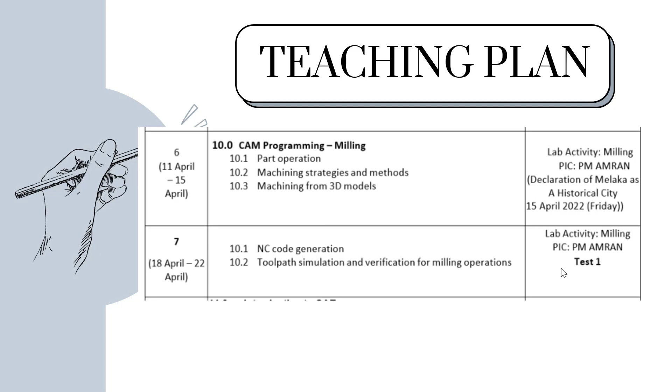Duration is 1 hour 30 minutes. Location uses the ULearn platform. Date: 29 April 2022, Friday. Time is 5 PM until 6:30 PM. And the topic is CAD/CAM and Fusion 360.

For this milling operation, the activities covered are: create 3D part model, create 2D drawing from the 3D part model. This is optional. Then start with the milling operation, facing, roughing and finishing contouring. Continue with the milling operation, open and close pocket. Then milling operation, corner radius at top surface.

And then drilling 10 mm and 20 mm hole. Next, continue with update cutting tool number. Then update process sequence. Because you already finished the process, you have to update the cutting tool number, update the process sequence and generate setup sheets. This is the process of the milling operation, and continue by generating the post processor to generate the G codes and M codes.

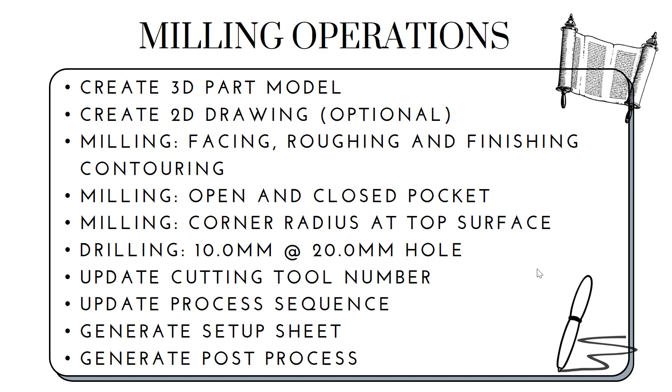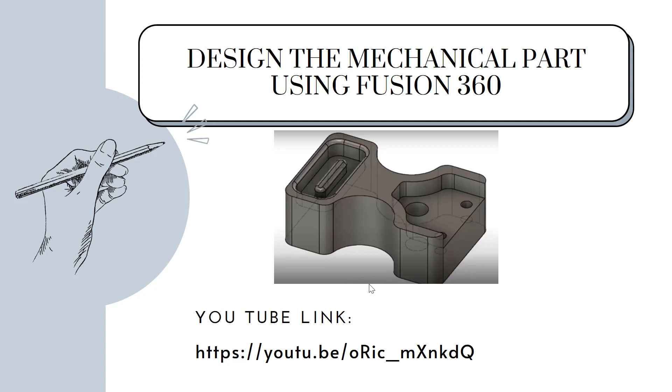First you have to design the mechanical part and 3D part model. Here we can see the parts of the 3D part model. There is a close pocket with island, radius at the island top surface and radius at the close pocket. And this is the open pocket having 3 holes: 2 holes with diameter 10 mm and 1 hole of 20 mm. This contour has a corner radius on 4 sides. You can see the steps to create this mechanical part from the YouTube link below.

This is the drawing for the mechanical part. The length is 150, the width is 100 and the height is 50 mm. The open pocket depth is 15 mm having 3 holes: 1 hole is 20 mm, 2 holes are 10 mm. This is the closed pocket, with length 80, width 35 and depth 15 millimeter. And the island height is 10 millimeter.

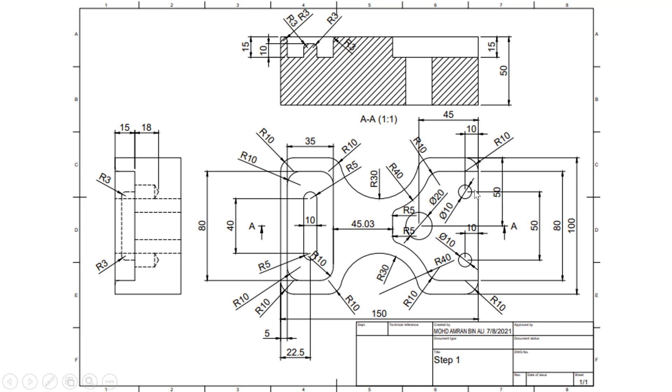There are 5 steps to create the 3D model. First is create rectangular sketch. Second is create closed pocket. Third is create open pocket, then create 3 holes at the open pocket, and create fillet at the edge of the island and closed pocket.

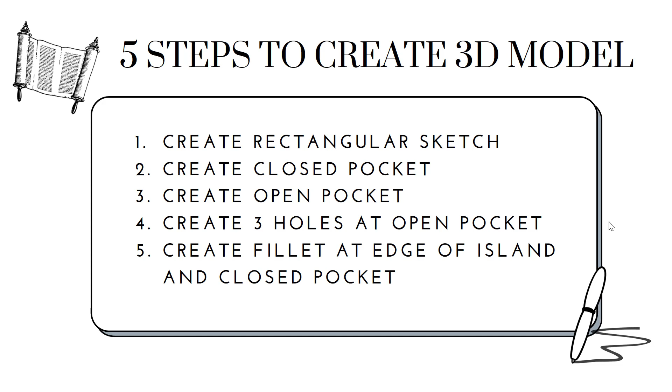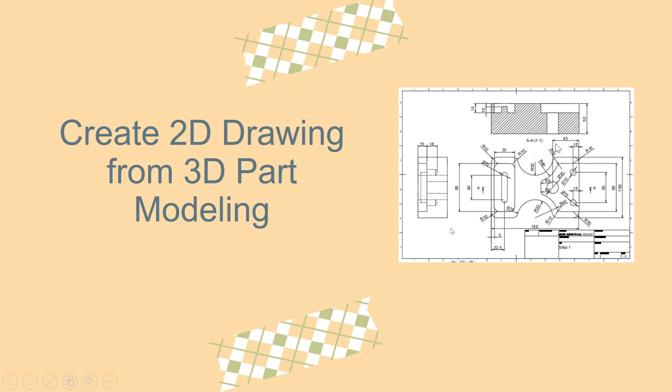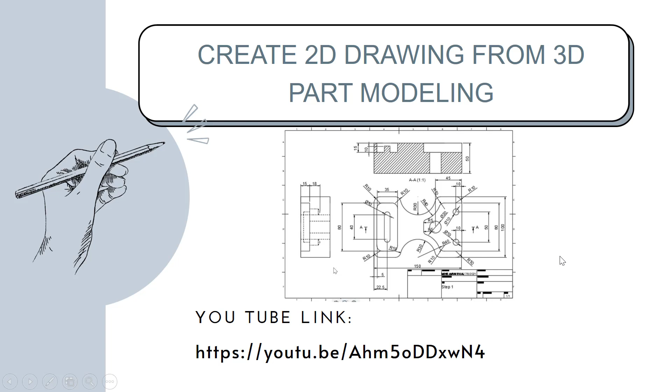Now we continue to create the 2D drawing from the 3D part model. This is how you should get it. The YouTube link you can see here below. 5 steps to create a 2D drawing. First, select from design in the drawing workspace and select export to PDF. Then continue with section view, projected view, and lastly create dimension.

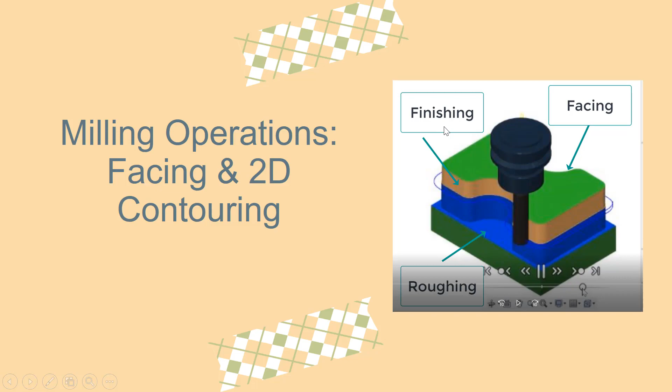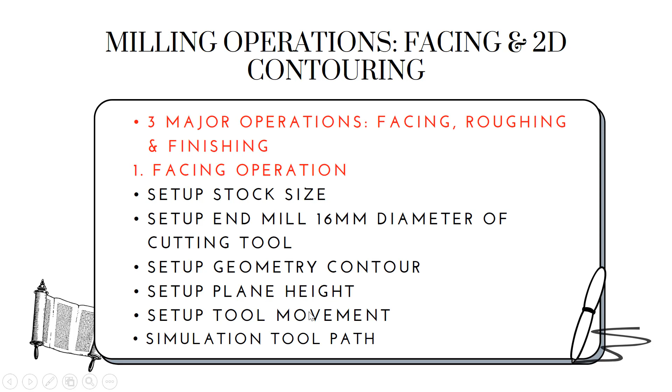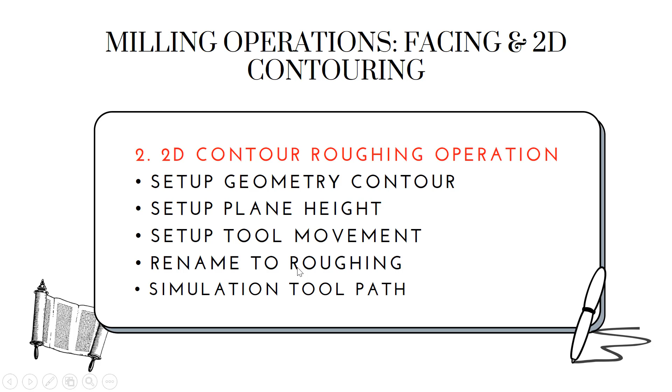Then the second process is the 2D contouring roughing operation. First step is set up geometry contour, set up plane heights, set up tool movement, rename to roughing, and simulate the tool path. You have to rename it to roughing because there are 2 processes, roughing and finishing. This is the process of the 2D contouring roughing operation.

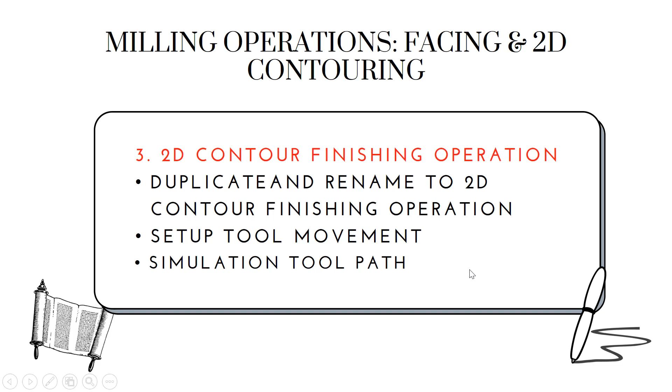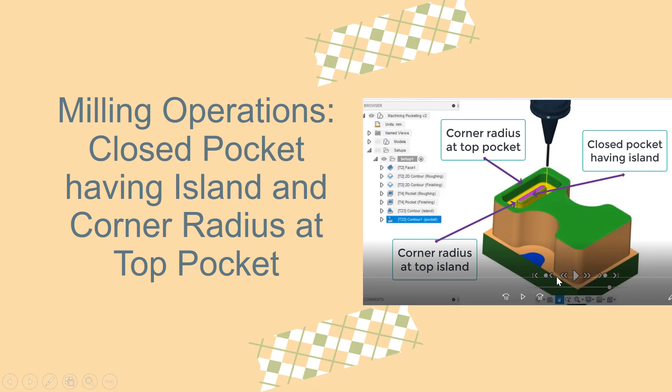This milling operation is the closed pocket having an island and corner radius at top.

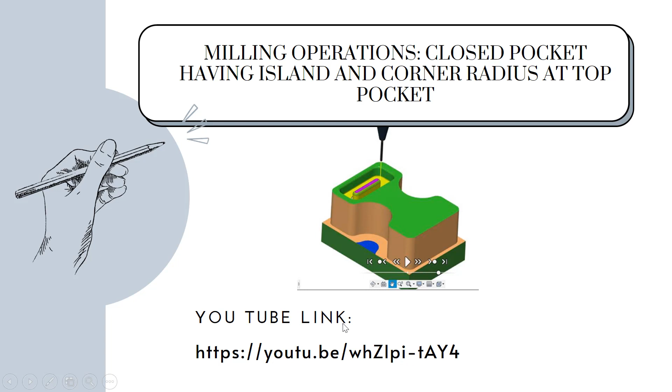There are 4 major operations for this closed pocket having an island and corner radius at the top pocket. First is roughing and finishing the closed pocket, and then milling the radius at the top of the island and the radius at the pocket top surface. First is the rough closed pocket operation.

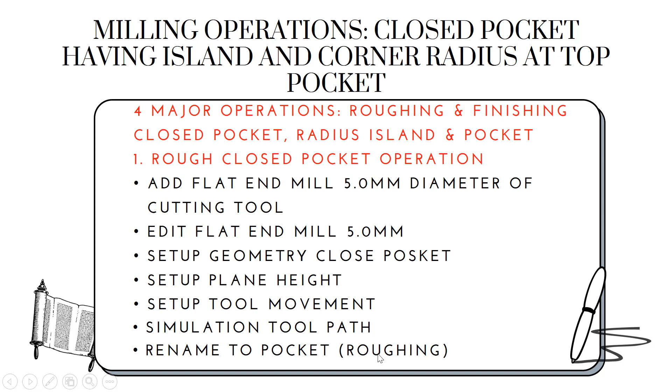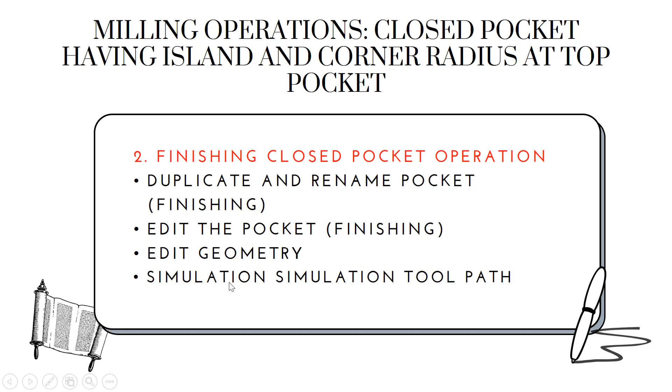Continue with the finishing closed pocket operation. Duplicate the folder and rename the pocket to finishing. Edit the pocket finishing, edit geometry and simulate the toolpath. You can see the different colors. This we call magenta, and this is orange. You can see the difference between roughing and finishing.

The third process is to cut the corner radius at the top island. Add the contour process. Add the ball nose 2 mm diameter. Set up to cut the corner radius at the top island and simulate the toolpath. Then duplicate this folder, contour island to contour pocket. After duplicating, edit this process, for example set up the contour and simulate the toolpath, and in this video we can see some adjustment.

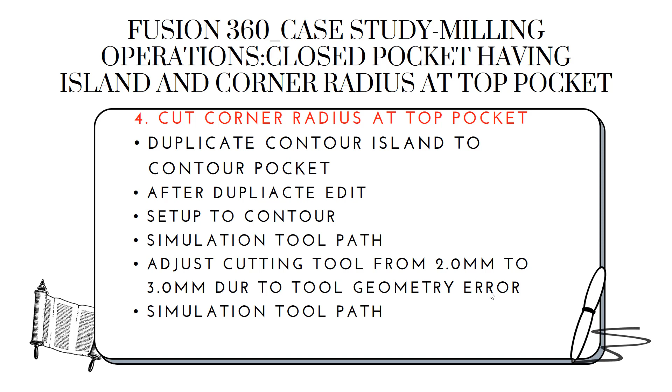Adjust the cutting tool from 2 mm to 3 mm due to a tool geometry error. That means the 2 mm cutting tool length is not enough to cut the closed pocket. So the tool must change from 2 mm to 3 mm. And then last is the simulation toolpath.

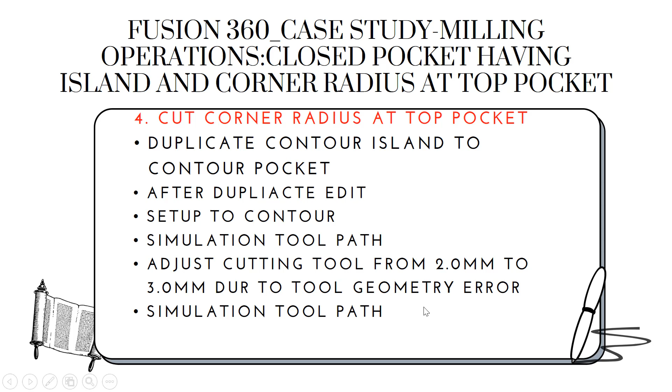You can see here the process of roughing and finishing the pocket using the flat end mill. This is how to make the radius at the top of the island and the corner radius of the top pocket.

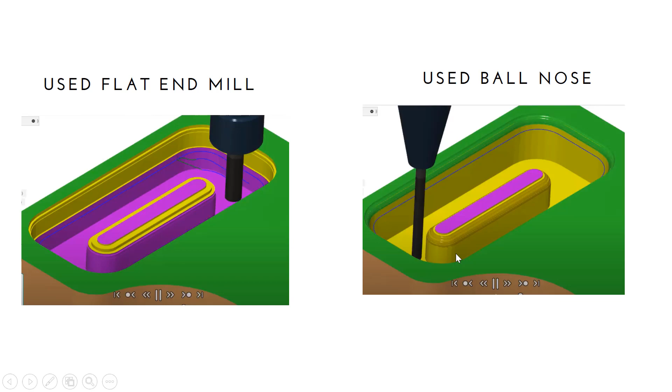Next, continue the last process: milling operation, machining open pocket and drilling. Okay, you can see there are holes: one hole 20 mm, and two holes are 10 mm. This is the open pocket. You can see this process from the YouTube link below.

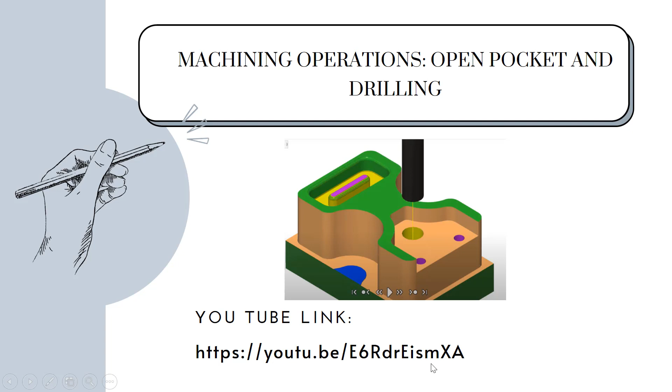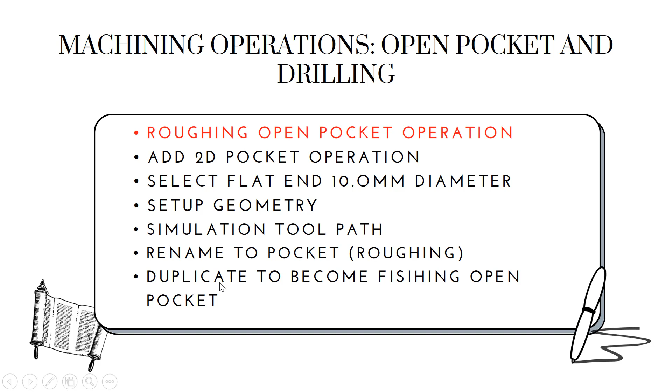Okay, first, roughing the open pocket. Add a 2D pocket operation. That means you have to select the 2D pocket operation. Select the flat end mill 10 mm. Then set up the geometry, simulate the toolpath, rename to pocket roughing and duplicate to become the finishing operation. Because this open pocket has two operations, roughing and finishing, we have to duplicate the folder.

Okay, continue with the finishing open pocket operation. Add the 2D pocket operation. This means the one we duplicated just now. And then edit the process untick stock to leave. This is the process of finishing untick the stock to leave. Then finally simulate the toolpath. Then rename this folder to pocket finishing.

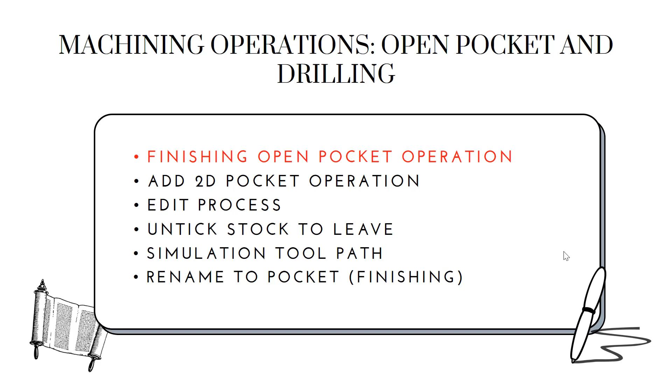Okay, this is the roughing and finishing pocket. You can see the blue color is roughing, and this orange color is finishing.

Okay, now we continue to the drill hole 10 mm operation. Add the drill operation, then set up the drill process, select drill 10 mm diameter and edit the tool. Edit also the geometry, the length of the tool, and simulate the toolpath. Rename the folder to drill 10 mm and duplicate the process. Duplicate the process and rename to drill 20 mm.

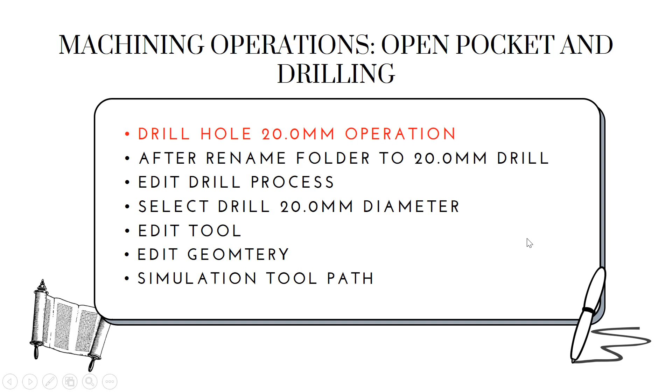Okay, drill hole 20 mm operation. After renaming the folder to 20 mm drill operation, edit the drill process, select drill 20 mm diameter, edit tool, edit geometry, and last, simulate the toolpath. Okay, this is the drill hole. This is 20 mm and these two are 10 mm.

Final planning. After you complete this milling portion, you have created the rough facing, roughing contour, finishing contour, and pockets, closed pocket roughing and finishing, and radius at the top, and also the open pocket roughing and finishing, and drilling the three holes, diameter 20 and diameter 10 mm. After that you have to update the cutting tool number.

Because the cutting tool numbers are different between the processes, you have to make sure the cutting tools follow the numbering. And then update the process sequence also. Generate the setup sheet and generate the post processor. In the setup sheet, all the milling processes will be shown. And for the post processor, this is how the G code and M code will be displayed.

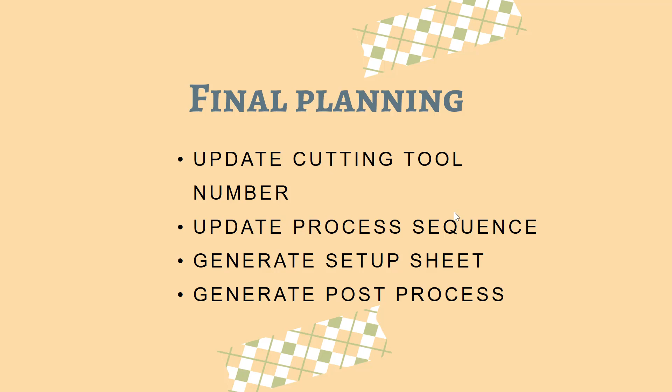Okay, this is the updated cutting tool number and process sequence. You can see here: T1 face, T1 2D contour, T1 2D contour, T2 roughing pocket, T3 contour island, T4 contour pockets, T5 2D pockets, T5 2D pockets, T6 drill diameter 10 and T7 drill diameter 20.